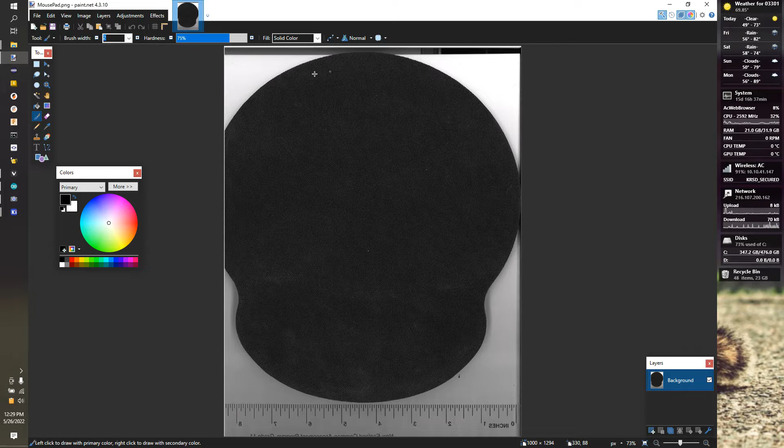The first thing we're going to do is cut this down the middle at the top of the mouse pad. That looks pretty close to the halfway point of our mouse pad. Control, image, crop to selection. And that gives us our size. We'll make sure that when we size this, it ends up the right scale in Onshape.

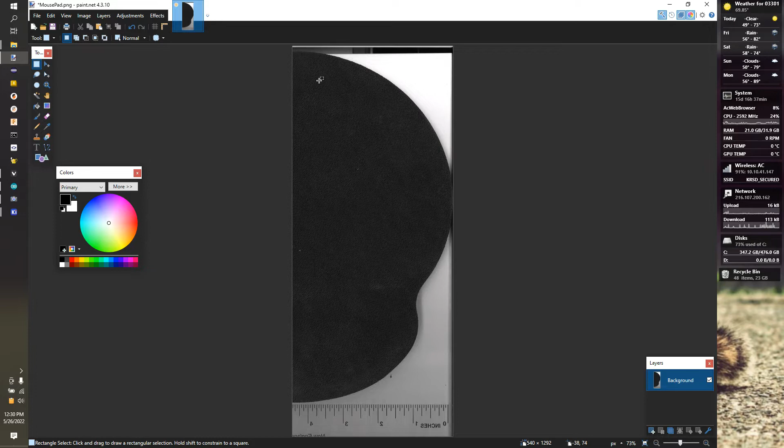So we're going to grab this thing now. We're going to do a save.

I'm now going to go over to my Onshape model in our document, and we're going to hide all this stuff. Oh my gosh, it's a little stupid separate thing. It's annoying. Plus import the split mousepad.png.

And now I'm going to start a sketch. I need to create a document, create a part studio. You would have one by default. I just deleted it because I did a test run of this before I did the video.

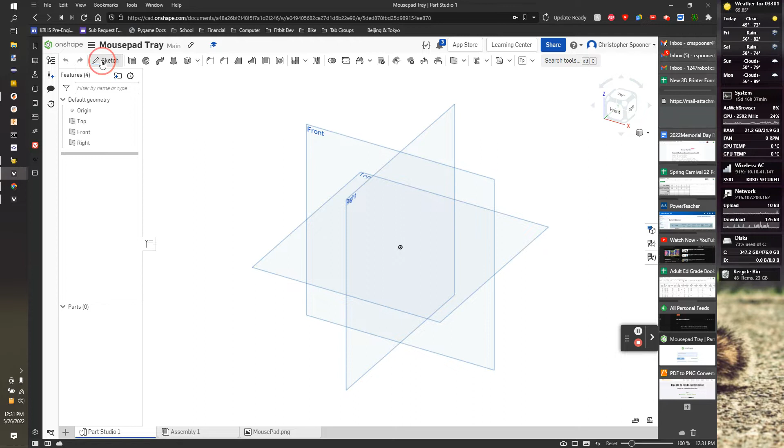I'm going to start a sketch on my front plane, and I'm going to grab the image and make that way bigger. So I'm going to pull this out.

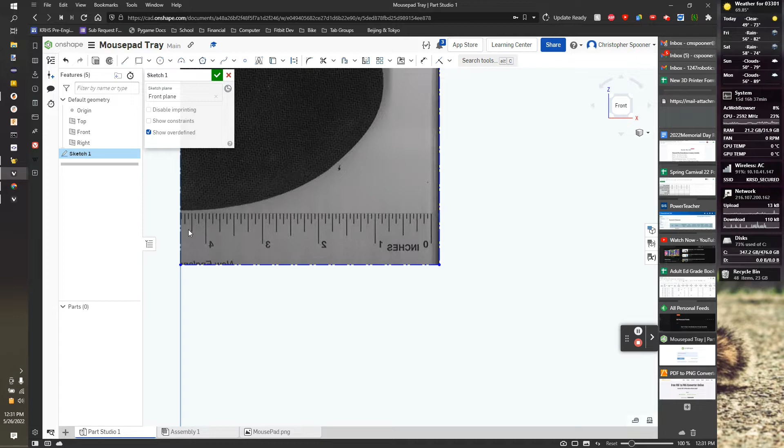So this gap is a 1/4 inch. I looked: 1, 2, 3, 4, 4 1/4, 4 1/2, 4 3/4, 4 7/8, plus 1/4. So I'm going to dimension this image to 4 plus 7/8 plus 0.25. Because it will scale linearly, this should be the exact size of our piece, but we will test that before we actually 3D print anything.

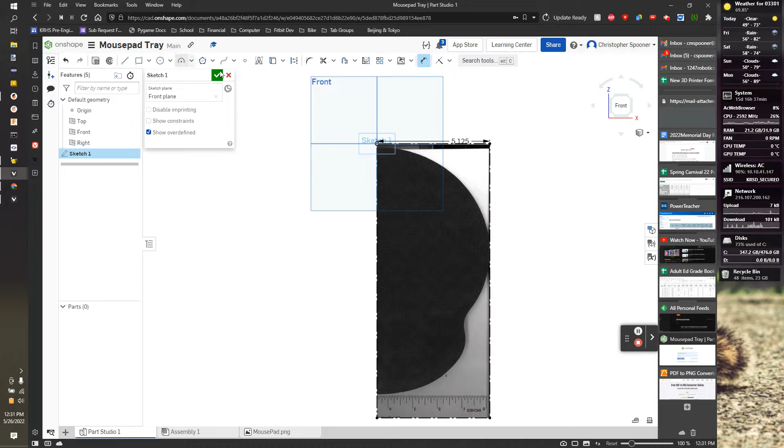At this point, it's now time to start doing our trace. We're going to use our spline tool, and I'm going to start the bottom one. It's easier to start right here, and I'm just going to zoom out some so I don't have to have this nearly as big.

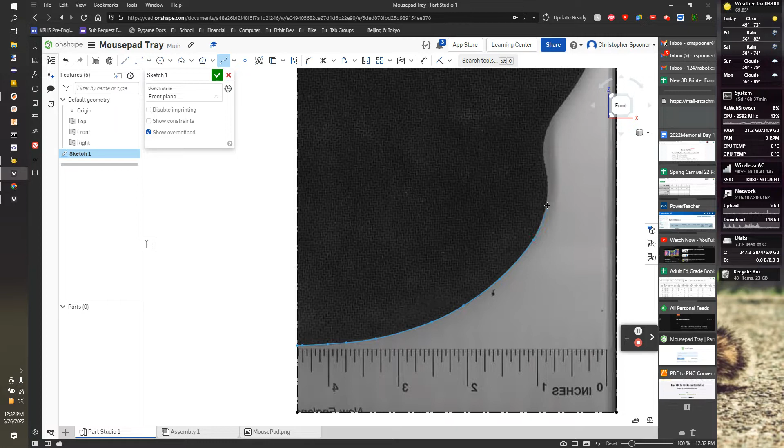We want to get as close as possible, but if it's not perfect, it's fine because we will add some tolerance to this so that if we're not exactly right, it's okay.

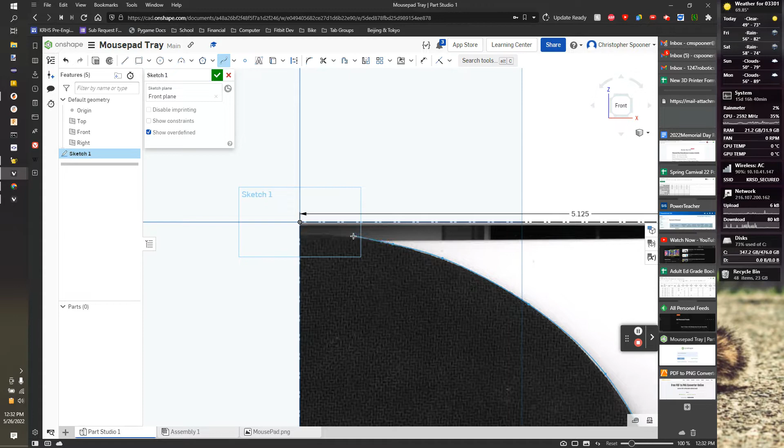So I'm going to come back around over to the top. And I ended up with a weird thing. Control Z, Control Y. Okay, this is connected. I want to remove that connection point.

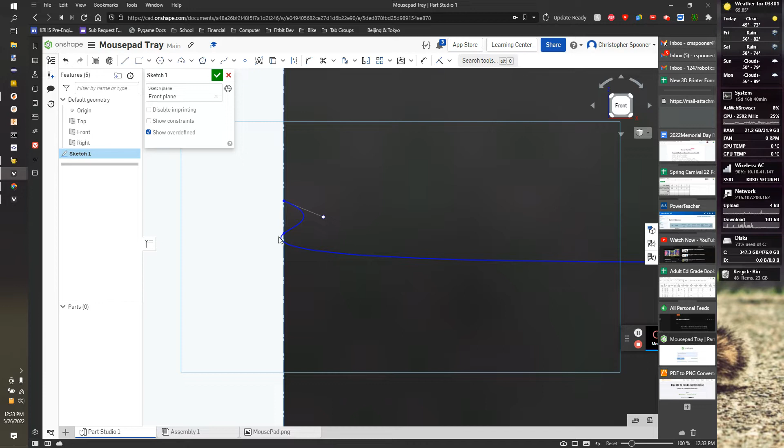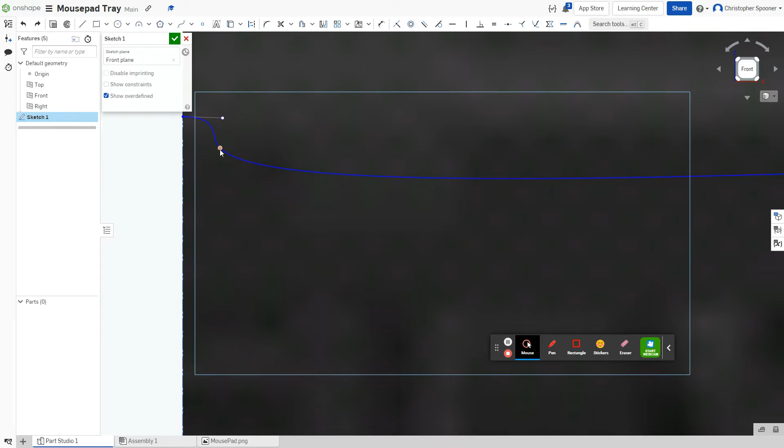Now, this needs to end up being perpendicular, so I'm going to hit F11 so I can see everything. I'm going to set this perpendicular to here. And now I need to go like that. Let's see if I can get it now.

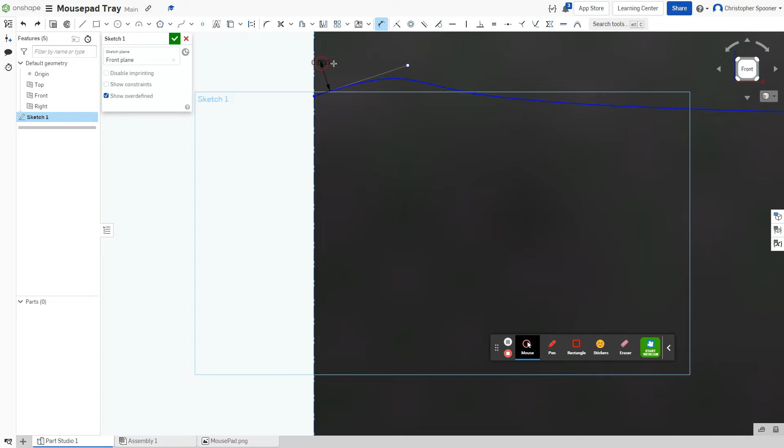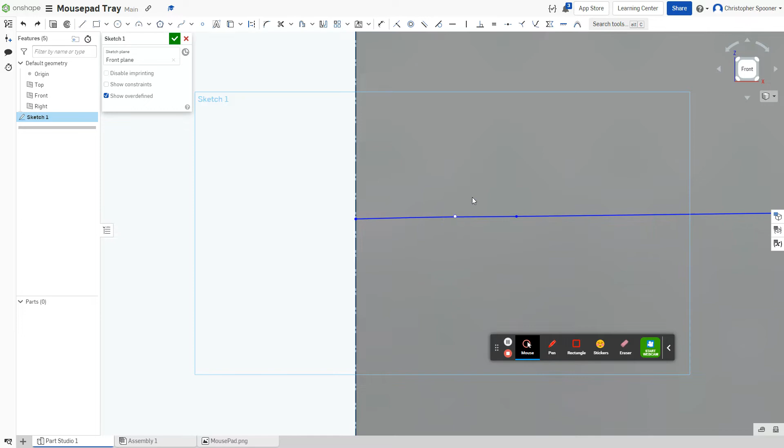All right, let's try dimensioning it. Oh, that's weird. All right, I guess we will carefully make it as straight as possible, and we're going to zoom back. I think we'll clean this up a little bit. That looks generally good. I also want this to be as close to perpendicular as possible.

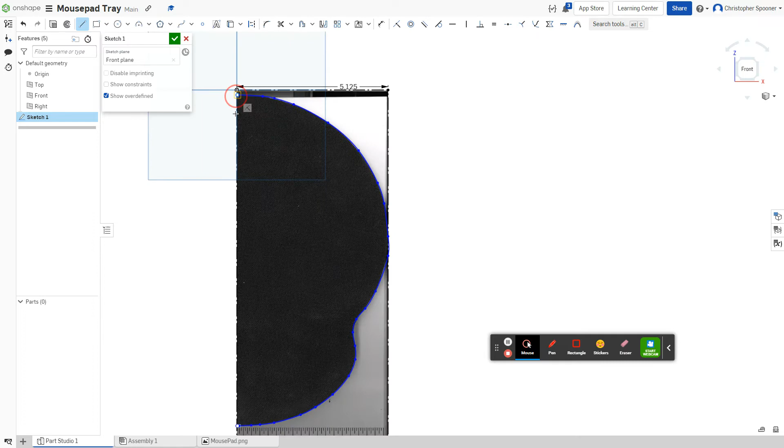And then we're going to add one more thing, which is a straight line down the middle, because we're going to mirror this whole thing. Okay, so we're going to extrude this.

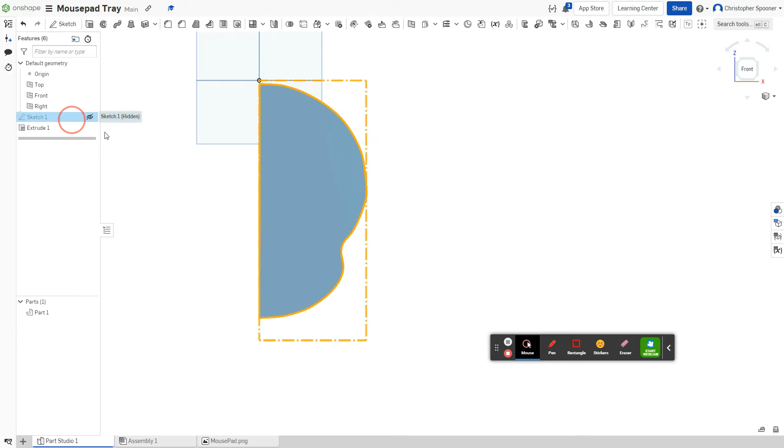0.1. And if I see some places that look a little weird, like that, I will go into the model. Oh, good. Coincident.

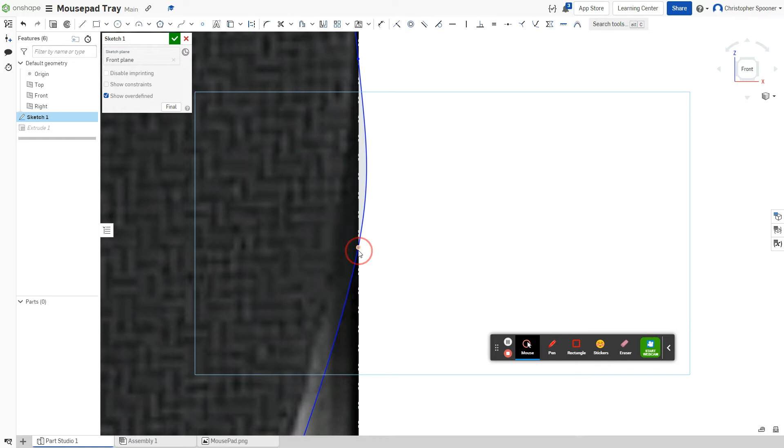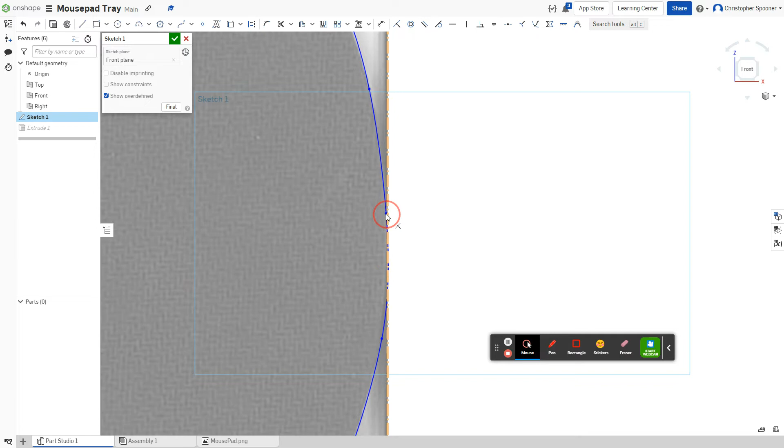Yeah, be careful of those. That looks better, it's getting better. I know this needs to... that looks pretty good. All right, let's mirror this object.

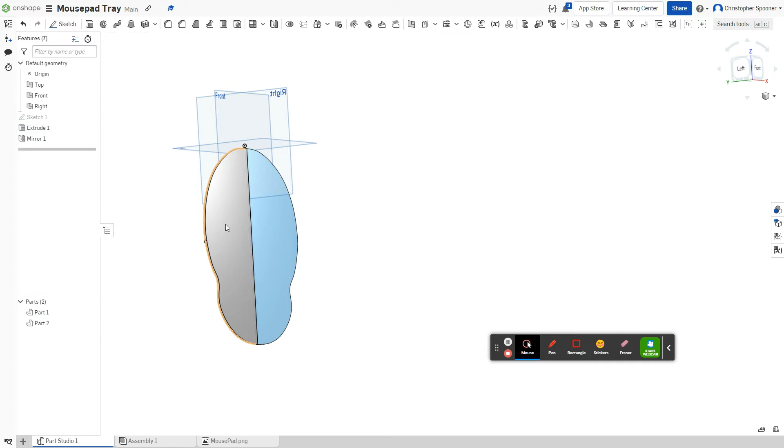Feature mirror. The mirror plane is going to be here, and it's going to make it two objects. We're now going to make this one object. So I'm going to Control A, or Control select both those, and Boolean to make them one part. All right, so now we have one thing.

All right, so this is the same size as our side, but now let's build the ridge around our mouse pad. So we're going to start it, project that. We're now going to do an offset.

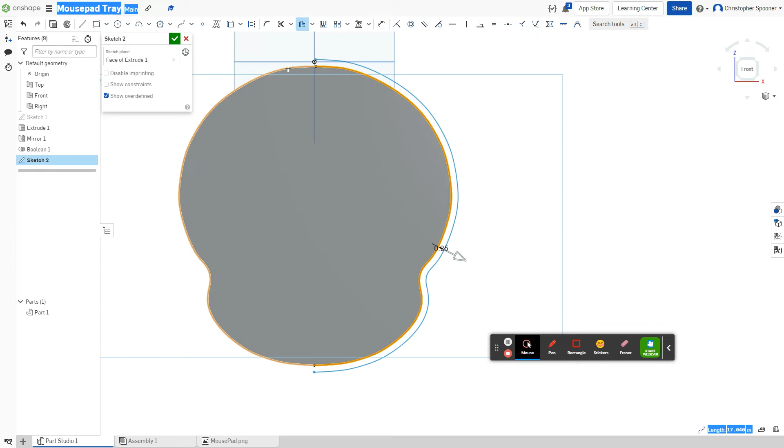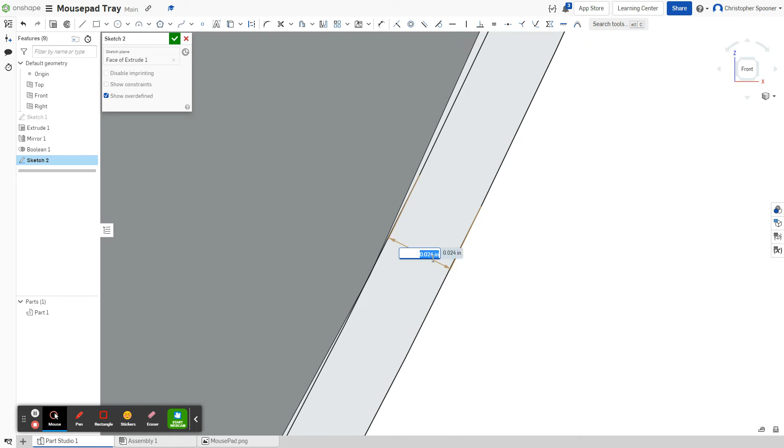And this first one's going to be our tolerance, so 0.065... 0.025 rather. Point 0.025. And now we're going to make a second outline.

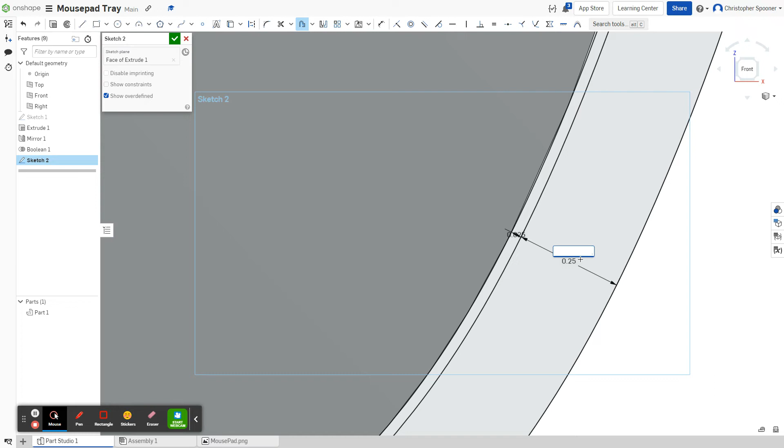So both sides of that, and this is going to be 0.1. So now we need to go...

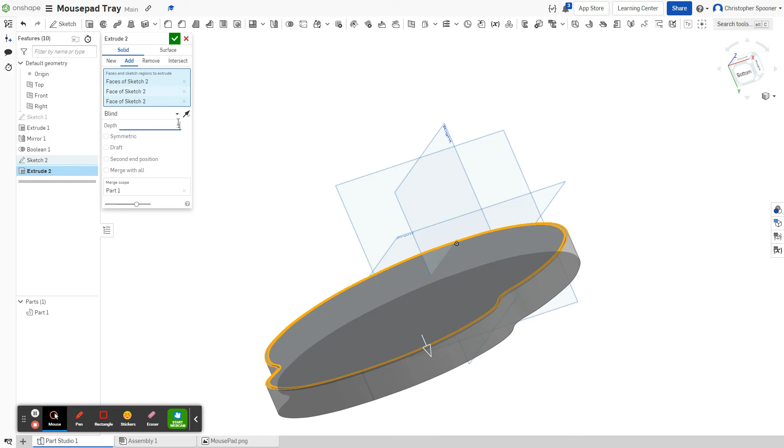Except I don't want to go that way, I want to go this way. I'm going to go 0.1. So now we have a slightly bigger pad.

Now I can start a sketch on here. I'm going to hit use one last time. I'm going to use offset another time, but this time we're going to pull it inwards. Oh, try again. Offset.

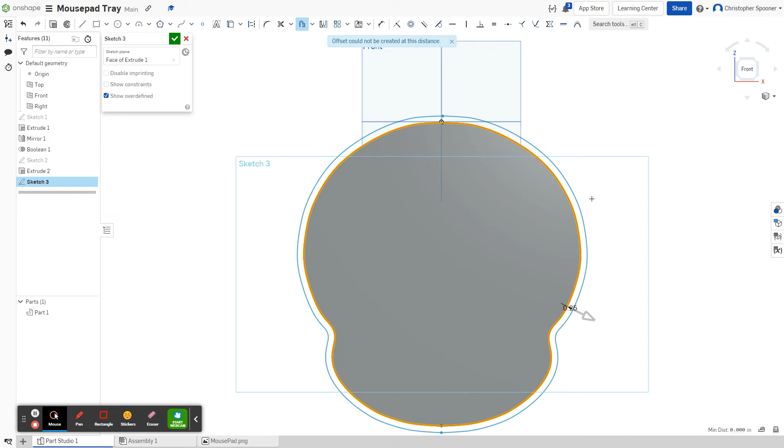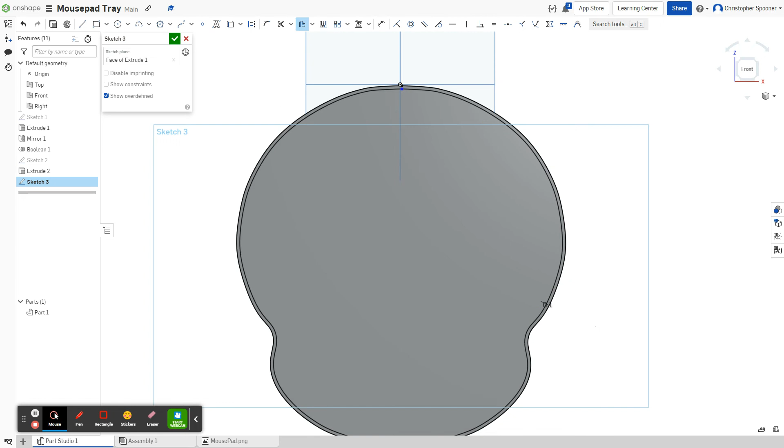And I'm going to do just a hair inside. New 0.1. There we go, that had some weird constraint, but we're good now.

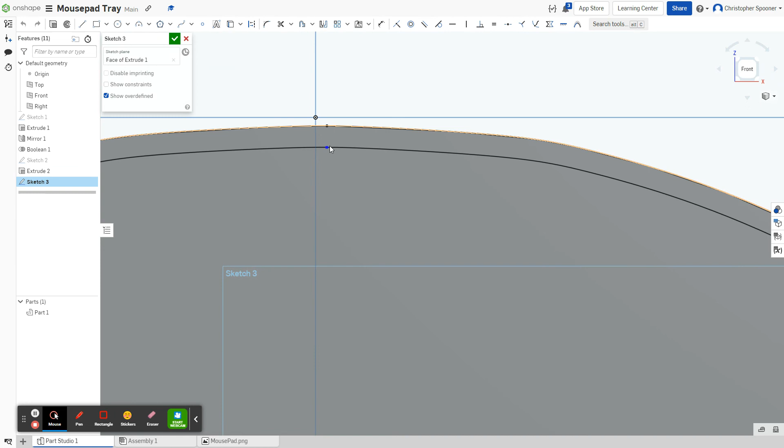And we're going to extrude just... okay, I see what's wrong. These points don't connect anymore. So let's reconnect those two points and see if that fixes us.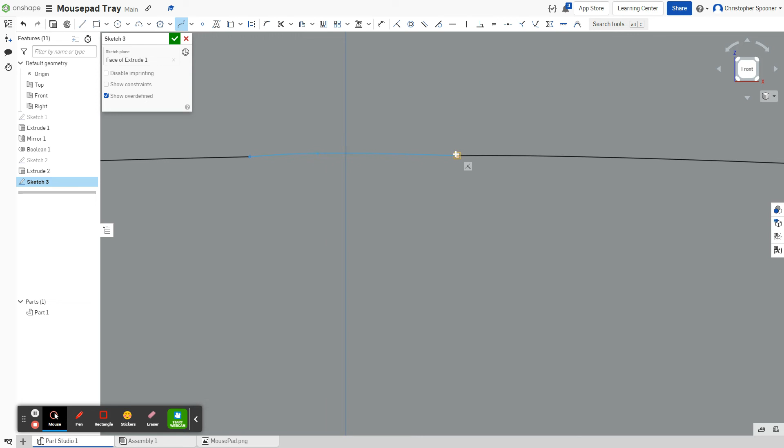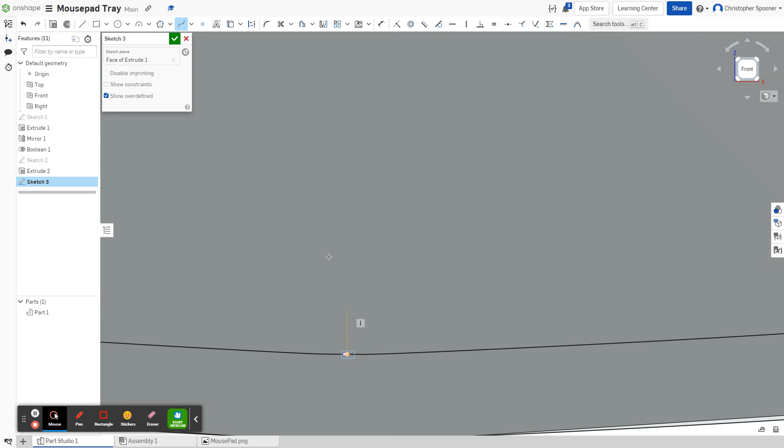Okay, I'm just going to make a quick spline to connect this point, and do the same thing at the bottom. I'm just going to make a tiny spline to connect these so they... there we go, let's see if that now extrudes.

Shift E for extrude. Good. And I'm going to go only up 0.05 because I don't really want much. And now let's add some of these fillets.

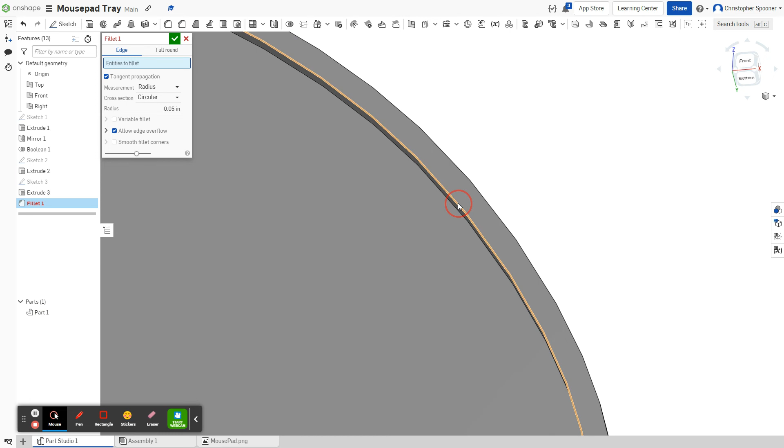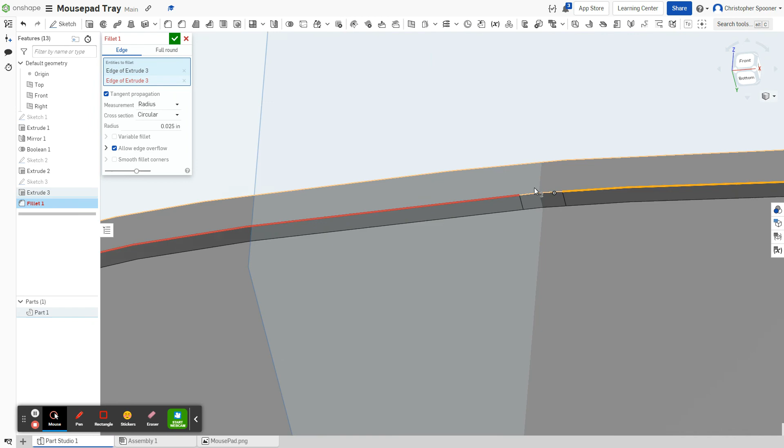No, not there. It doesn't want to add. Let's see if I grab the little sections here. Oh, it does not. Oh, to do it. There we go.

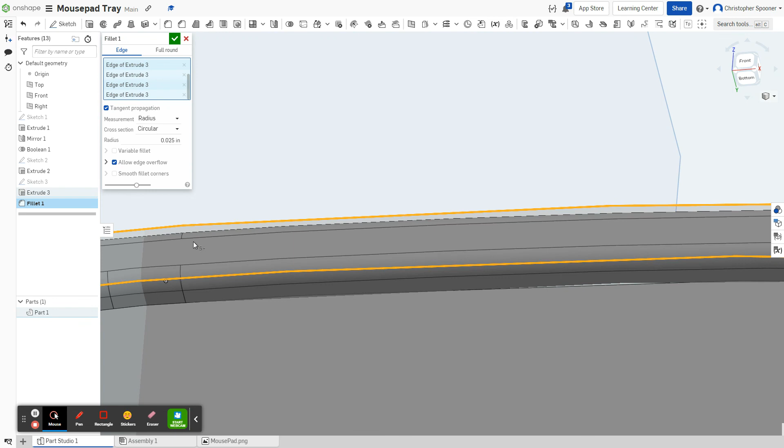There we go. We can probably just bring this back up to 0.05 now. Let's go 0.045. There we go.

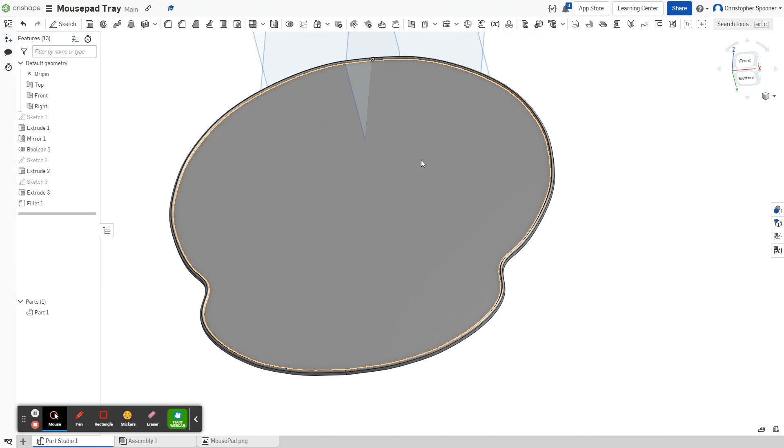Now, before I do anything else, we need to see if this is going to work. So what we're going to do is now create a drawing. I'll do that in the next video.